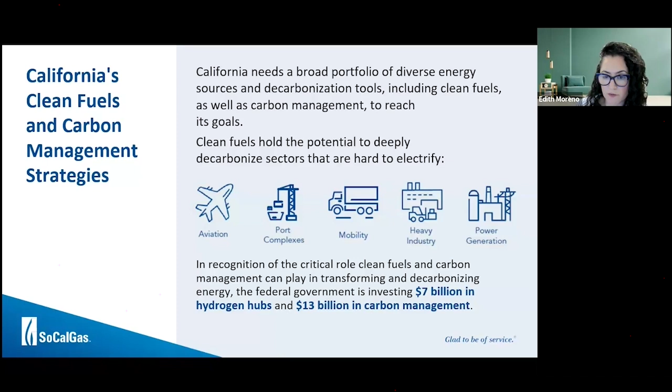The federal government is investing about $7 billion in developing hydrogen hubs. And then also there was some money that was set aside as well for carbon management solutions, so think of carbon capture or direct air capture technologies. And California actually was one of those hubs. So we are slated to receive about $1.2 billion in federal funding to facilitate the development of hydrogen hubs in California. So what is SoCalGas' role in developing this?

And so we have a proposal to build what would be hopefully the largest clean renewable hydrogen pipeline system that would deliver reliable hydrogen to the LA basin to power the ports, to support the heavy duty transportation sector. And with providing that fuel to power these sectors of the economy, we could hopefully see a significant improvement in air quality and reduce our GHG emissions from the hard to electrify sectors in the LA region. We're about a year and a half into the process since the commission authorized SoCalGas to proceed with this work. So we're expecting to complete this first phase of Angeles Link.

I wanted to highlight quickly what SoCalGas is actively doing today in terms of a tangible project with hydrogen. So we have built what we're calling the Hydrogen Innovation Experience at our Energy Resource Center in Downey. It's a showcase of how both the gas, as in hydrogen, and the electric and the renewables all come together to work and power. Essentially, it's a small scale microgrid demonstration project that we have connected to a home. So we have solar panels on site that power the electrolyzer. That electrolyzer produces hydrogen on site.

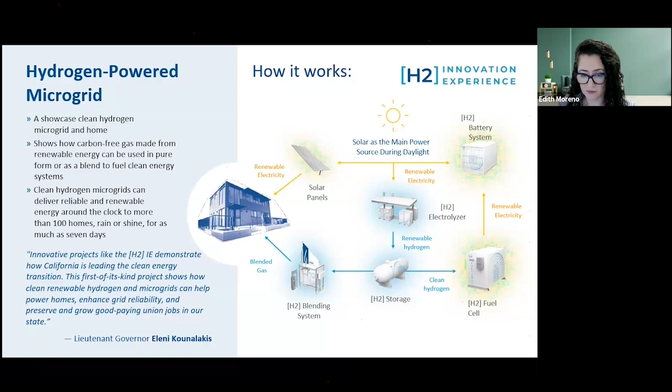Hydrogen is widely used today. There's about 1,600 miles of dedicated hydrogen pipeline. Right now we're in the process of hopefully bringing this hydrogen blending project into the real world environment. A lot of research today shows that we're pretty safe to blend hydrogen at low levels, but as a prudent operator of the gas system, we want to make sure that we collect actual data. And so what we proposed with the commission are two projects, one with the city of Orange Cove, and we also have a project at UC Irvine. Why we need an injection standard today is we want to be able to have a place where we can put the hydrogen that is being produced in state.

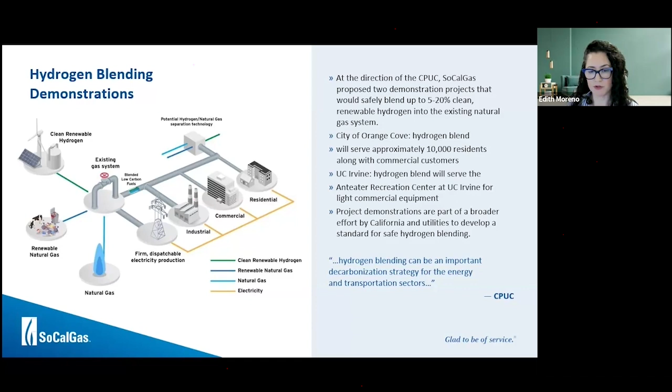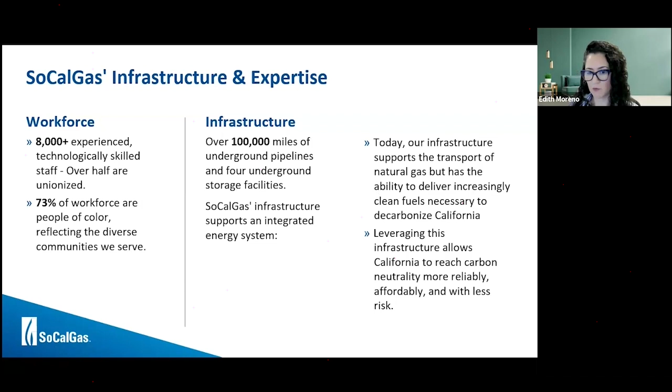We've been in the energy delivery space for over 150 years, and SoCalGas does have a really great workforce to leverage. Our bread and butter is pipelines today. And so the only difference in how we operate is instead of delivering natural gas today, hopefully we'll be delivering hydrogen to our customers in the future.

And the other concern, or the other advantage about hydrogen too, is that because it's so much lighter than air, if there is a leak, it's going to disperse much more quickly than like a liquid fuel at the gas station where it can pool. And because it pools, that poses a high risk of combustion. So

My opinion is that hydrogen can be safe with the right measures. But a big concern is leaks, right? Because hydrogen, it's very small. And so there are concerns about it leaking from our natural gas system. In the literature, NREL, the Gas Technology Institute, everyone agrees that hydrogen has these properties that suggest it should leak much, much faster. But this is based upon the assumption that we're looking at flows through typical channels.

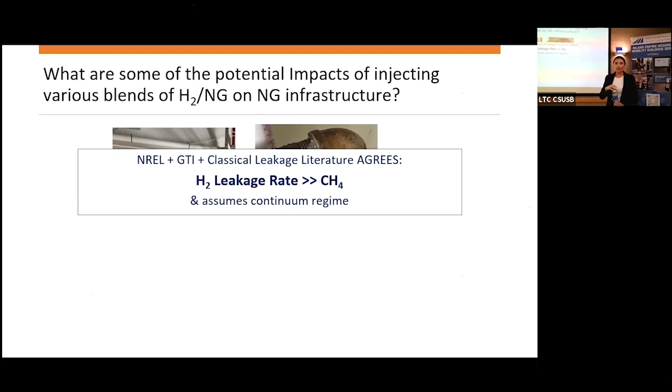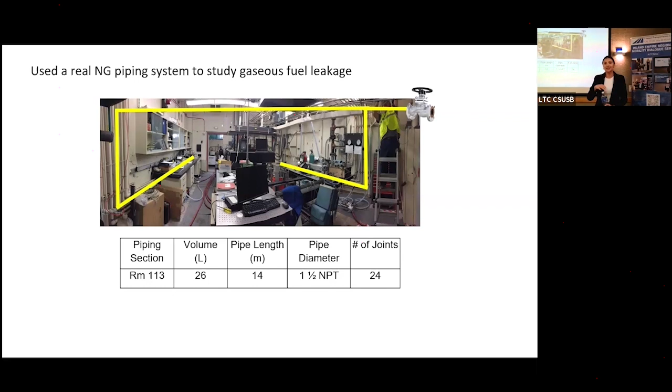Literature just suggests that up to about, I've seen like 10 to 20%, you can use existing natural gas appliances with hydrogen mixtures. So these were the results. So you can see along the y-axis, it's the pressure, and then along the x-axis, it's the time. And you can see that first of all, our system was leaking, right? Because if our system wasn't leaking, the natural gas pressure should have been the same over the course of the week.

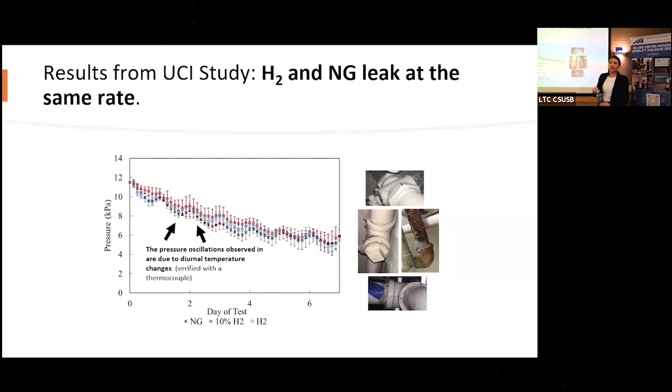So when we looked more closely at where the leaks were happening, we realized that they were happening at the joints, right? So at the elbows, at the T connections, if there were any caps or any kinds of valves, it was happening in those areas. So then we actually spoke with some people from SoCalGas that were running experiments on 5% hydrogen blends, and they also found very similar behavior where the 5% blend was showing the same rate of leakage as just the pure natural gas blend.

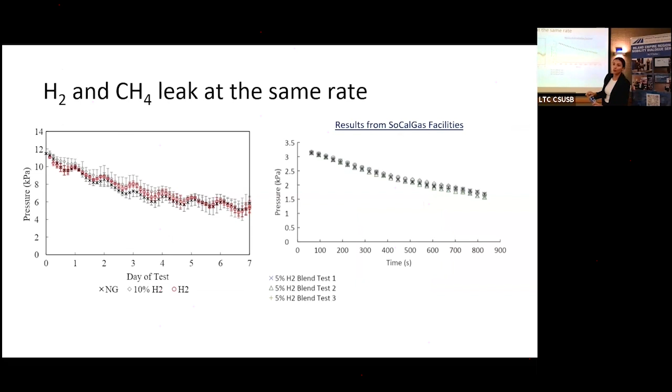Classical fluid mechanics assumes that the flow is steady, that it would fall under these flow regimes that are pretty ideal, like laminar flow, that we can ignore density fluctuations, that we can ignore any changes in viscosity, and also we can ignore the behavior of the molecules at the wall boundary. One of the key assumptions too in these macroscopic big flows is that you ignore that the flow is made up of actual small particles.

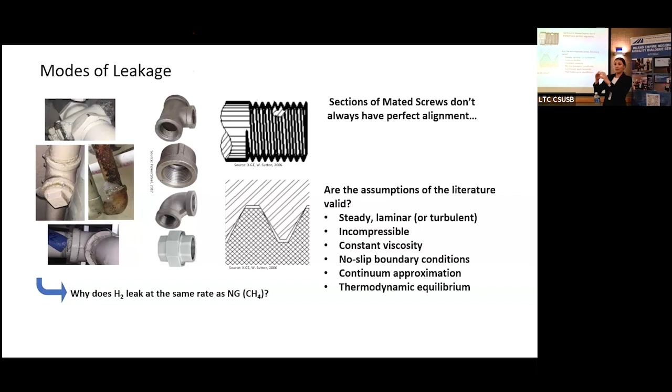But really, when a leak happens, it's not that your entire gas leaks all at once, right? You have tiny molecules that find their way and they separate from the bulk gas and enter that little crack in the wall. And so we propose the two-step mechanism. So the first step is that you have molecules freely moving around, right? Like the air in this room, it's just kind of moving and bouncing everywhere. So first of all, these molecules have to enter the leak crack. Step two, it's that the pressure is what's driving the leak rate. And so that is our hypothesis for why methane and hydrogen leak at the same rate under these kinds of conditions.

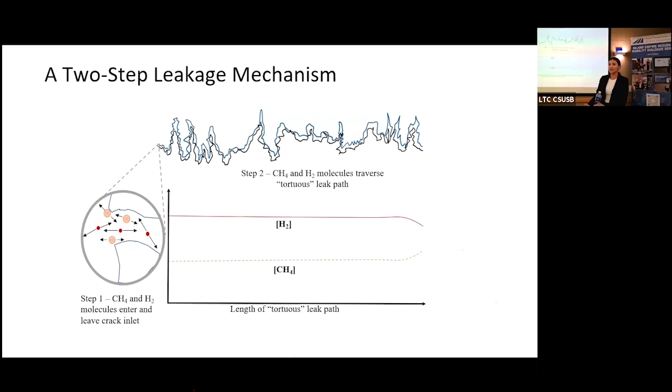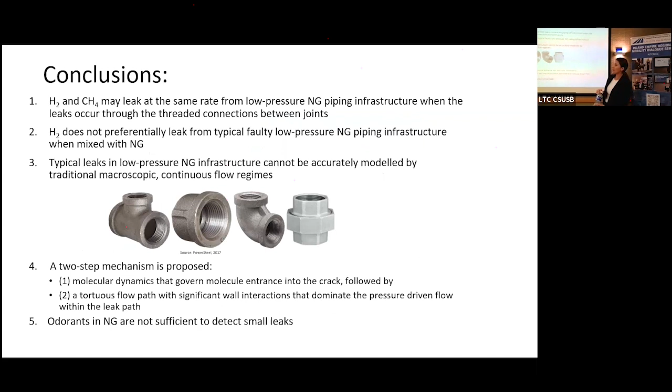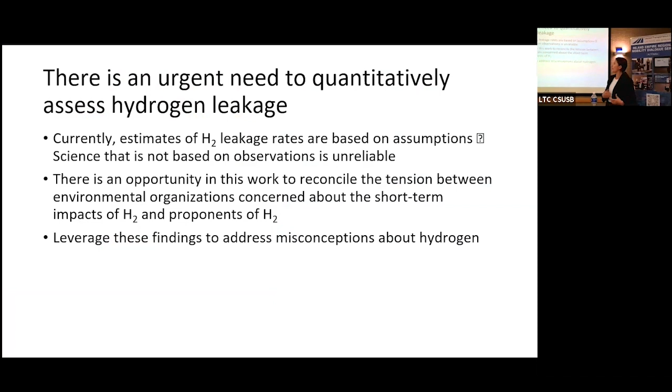And so these were some of the conclusions: that hydrogen and methane may leak at the same rate from low pressure natural gas infrastructure. Odorants in natural gas are not sufficient to detect small leaks. In the atmospheric science community, there's a big concern about the short-term climate impacts of hydrogen. But because we don't have quantitative evidence of how much hydrogen could potentially leak from the system, these models are only as accurate as the assumptions that they are based on.